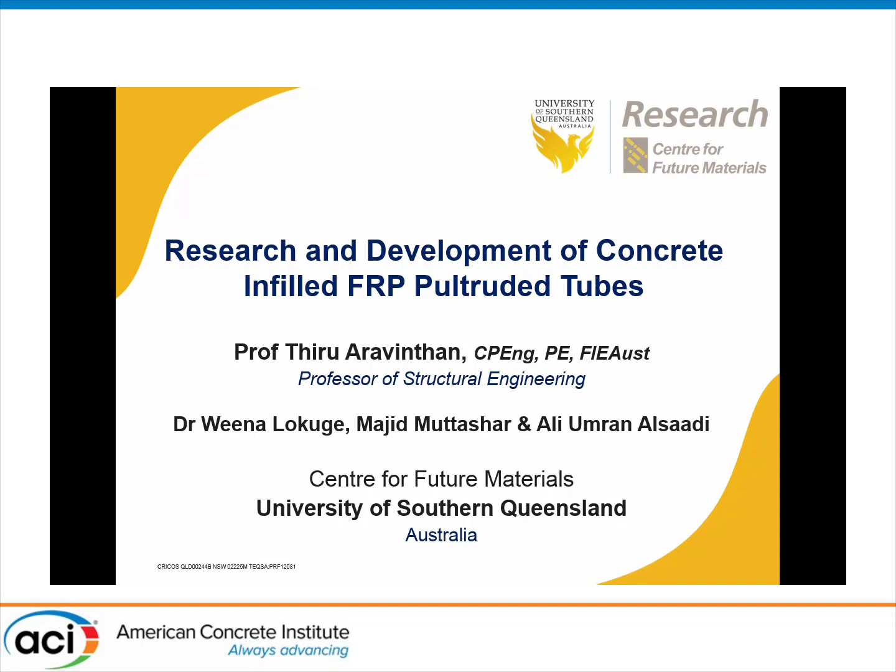So today I'll give a highlight of some of the work that has been done, particularly on the research and the development on concrete-infilled FRP tubes. At this stage, I would like to also thank my co-authors of this paper, Weena Lokuge, Majid and Ali Alsaadi. One of them is a former PhD student and the last presenter is a current PhD student as well at USQ.

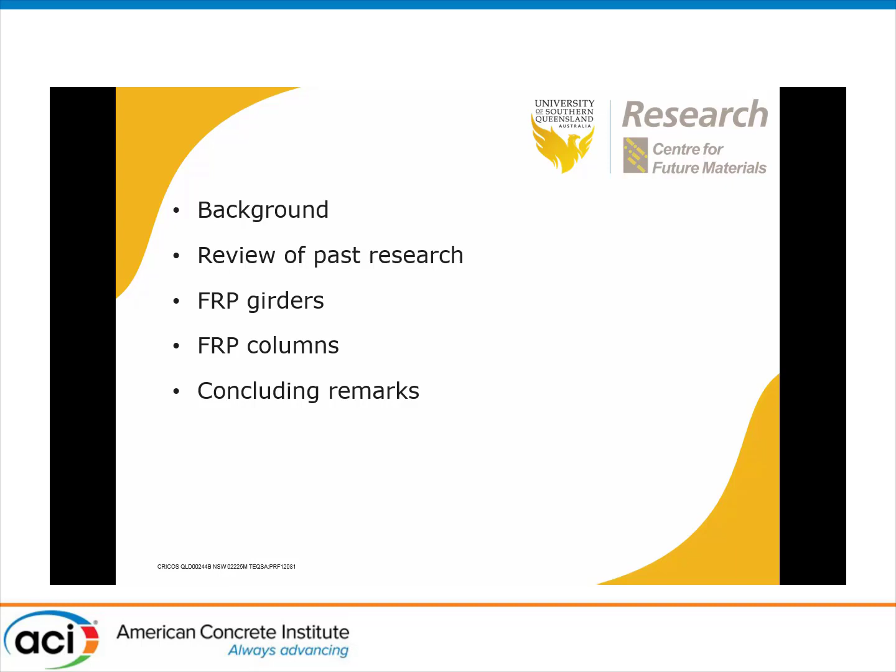The overview of the presentation will be in the form of looking at some of the background, review of some of the past research, and particularly focus on the work that has been done on FRP tubes as girders and the work that is currently being done as an axial member, particularly in the application of columns, and with some concluding remarks.

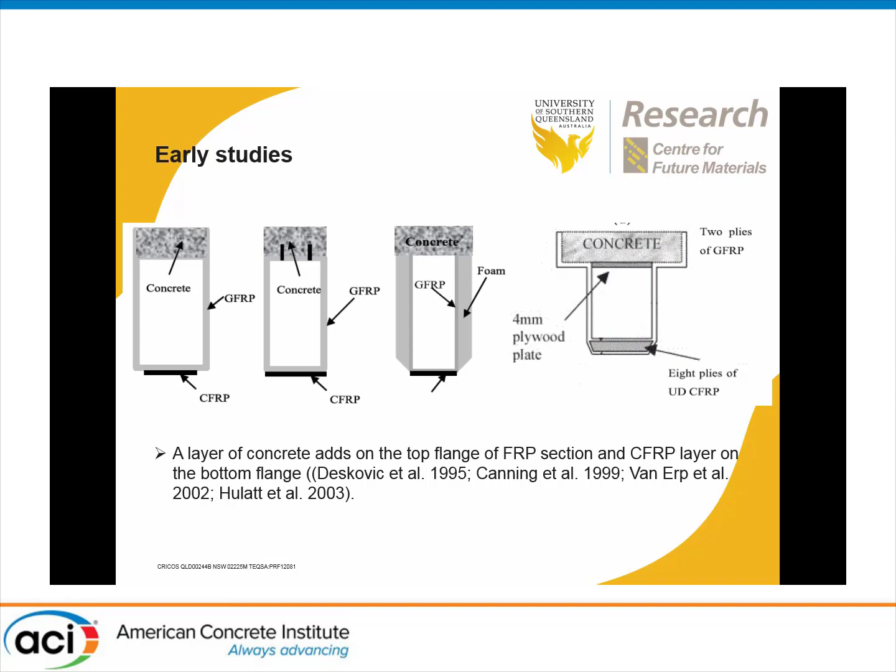Now, some of the early studies, probably you would have heard a lot about this, how as a concrete engineer we look at concrete structures and then start to look at how do we enhance its performance and how we use FRP, whether carbon, glass, in various forms. In the last 20 or 30 years, a lot of work has been done. So concrete structures, how do we enhance that? So then people start to look at it a little bit differently.

Now, can we combine this and make the FRP or fiber reinforced polymers one of the main components and also use concrete together with that? And this has resulted in some of the configurations as you would see here, like the concrete part followed by glass fiber laminates and more carbon fibers at the bottom instead of steel reinforcement. So that has resulted in these kind of structures.

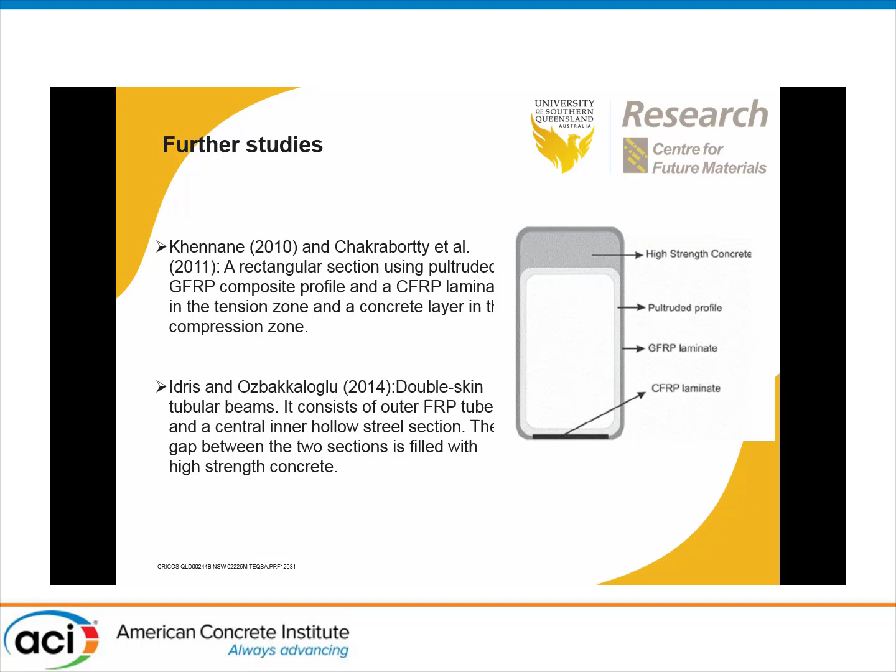And work has been done in this, particularly in the past at our university as well as in other universities. Particularly Amar Khennane from University of New South Wales in ADFA, and also at University of Adelaide there had been work done and well published in this. Then it went on to various other aspects of, okay, we have got these composites, how do we make use of that, and can that really be a product that can go into mass production as well as into the general civil infrastructure.

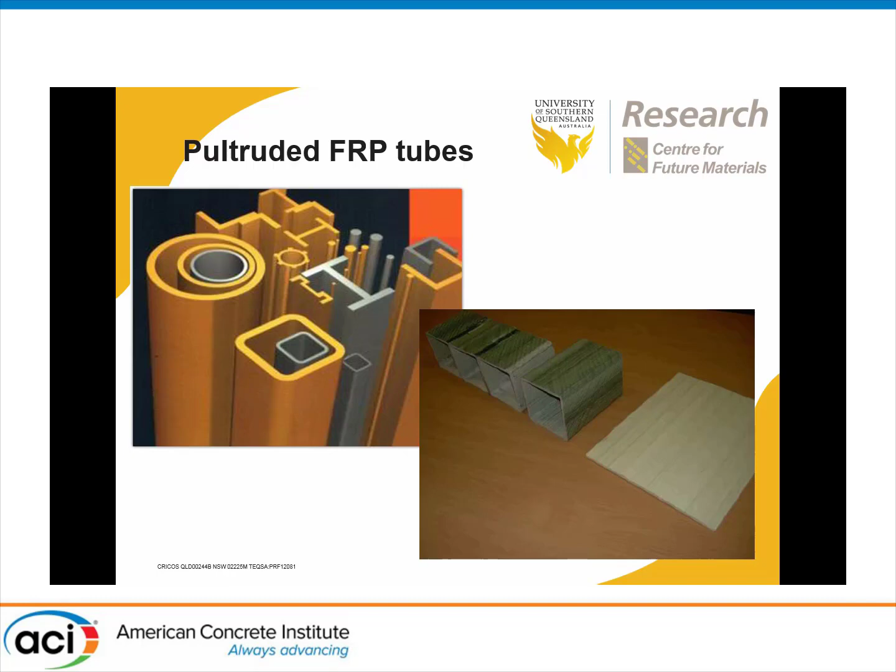And then we currently have various producers who produce pultruded sections in various shapes: I shapes, circular, square, and so on. Depending on the type of manufacturing, you will find some interesting products coming out into the market. Currently this is being promoted by the manufacturers. They are quite keen to get this into the market, and then as researchers we start to question how much it could be used and how it could be used, what are the issues and what challenges we have. So these are some of the things we look at as researchers in academia or in R&D organizations.

Now, pultrusion is commonly used in FRP composites. Carbon fibers and glass fibers have been heavily used in pultruded sections. But in addition to the normal pultrusions, where you mainly get the fibers in the main direction, the zero direction, the axial direction where it is being pulled, you have got the pulwinding technology where you can pull the fibers as well as wind some of the fibers around, forming fibers in the zero direction and also plus minus, like confinement fibers, around that.

So those are manufactured by pulwinding technology where you will get fibers in this direction and also in plus minus 45, where it's a continuous fiber that is manufactured and woven through. Only a few manufacturers in the world have got this technology developed. And so what we have looked at is, okay, how do these pultruded products perform?

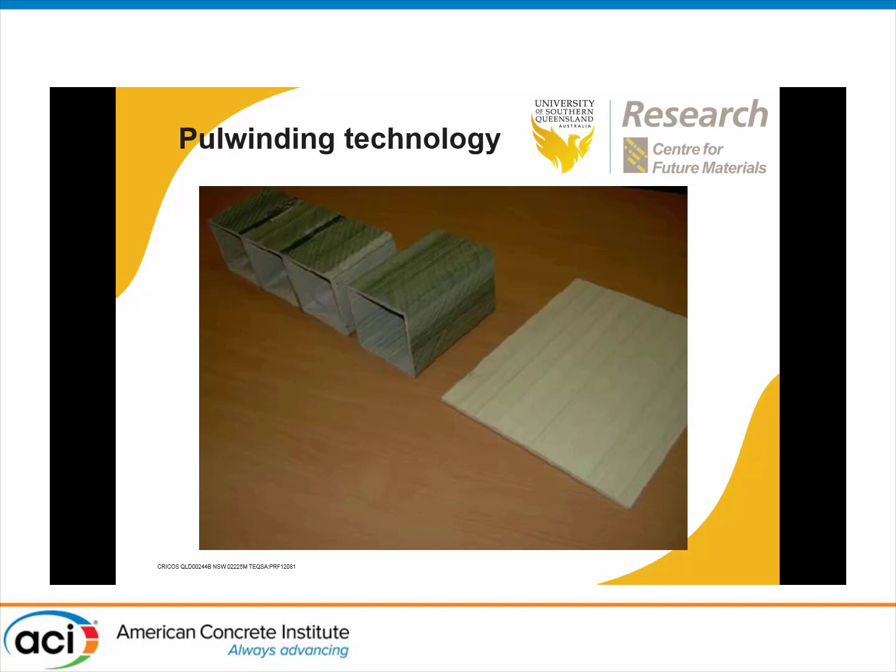We have got one particular manufacturer in Australia who has developed some products, particularly 100 millimeter, 4 inch or 5 inch sections, and flats and other things. Basically 5 millimeter or 6.5 millimeter thickness, a little bit about quarter inch, and 5 inch square or 4 inch square in the US, where we use SI units, 100 millimeters or 125 millimeters, in Australia and other places.

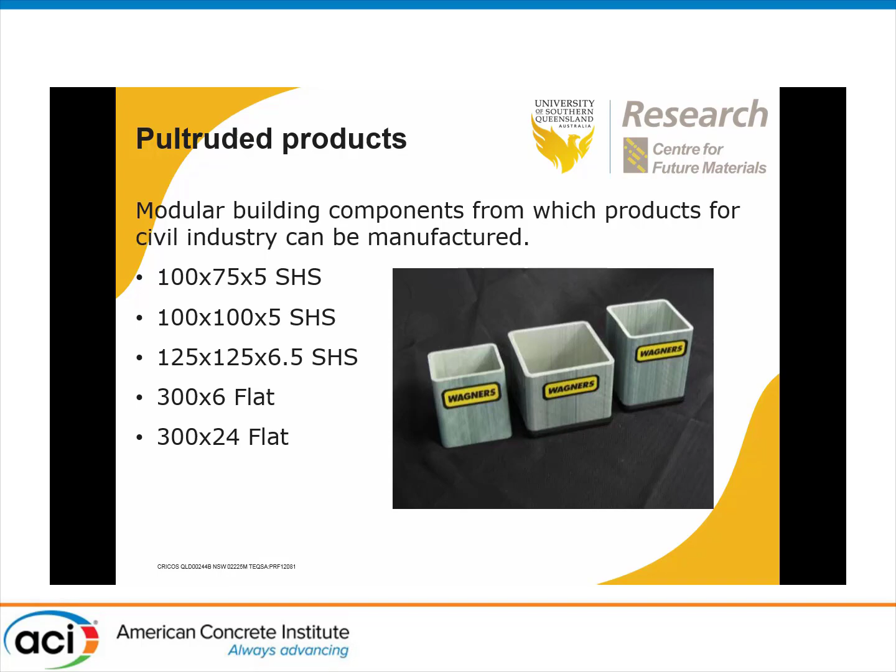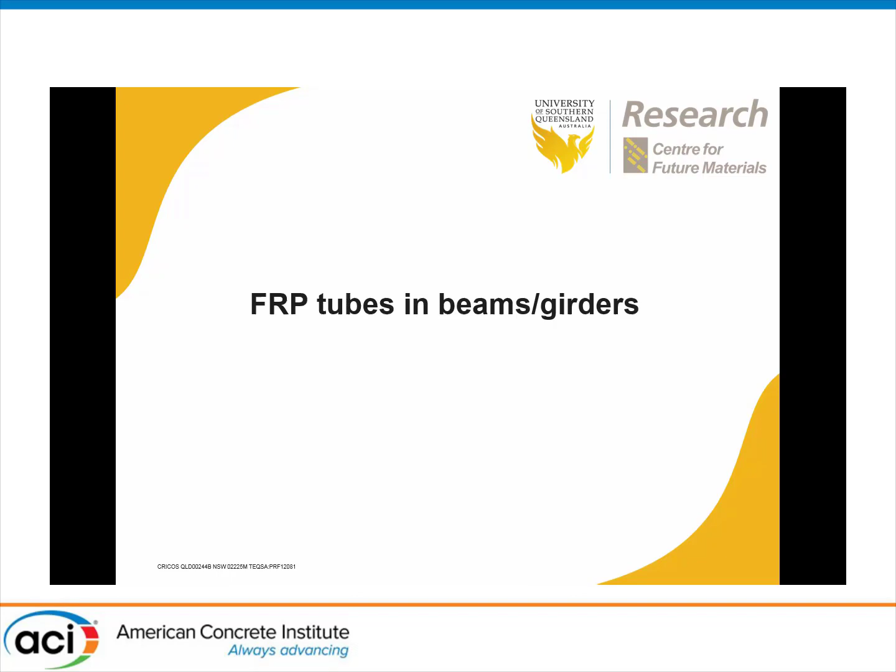So how are these products being used? The things we look at are beam applications, girders in the form of bridges and so on. And if we look at some of those applications, you will find these pultruded sections are being used as main girders, cross girders, and in some cases even as columns. And then that can lead into pedestrian walkways and other bridge structures and so on.

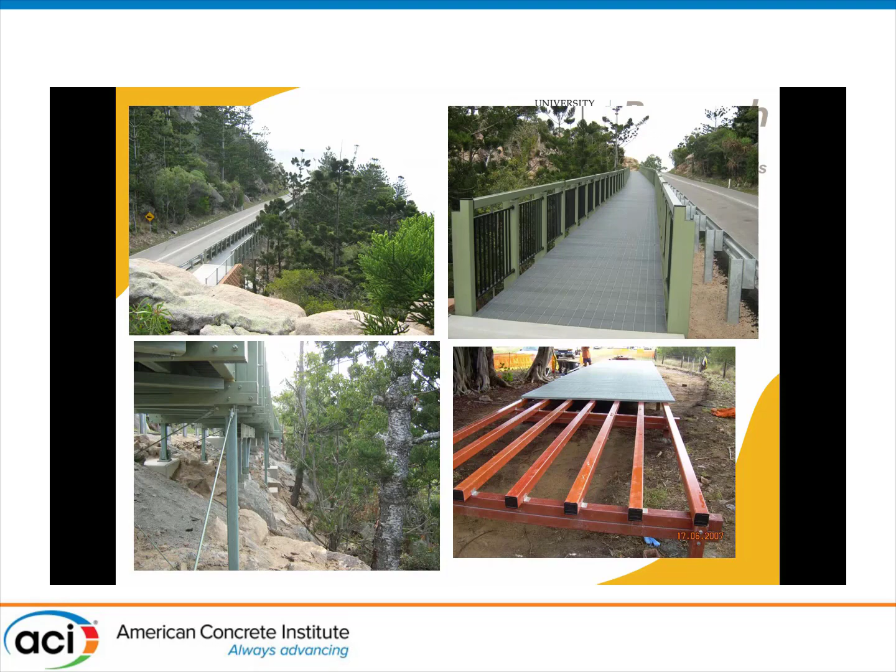And these have gone into some applications. These are using pultruded sections, and some other modularized forms of those pultruded sections with top and bottom flanges. So here you can see 3 of those pultruded sections have been combined with top and bottom flanges, typically replacing an I girder.

And then, of course, to make it to the market, you have to do mass manufacturing. And obviously, before it goes into anything in the field, considerable testing has to be done in proof loading and also ultimate testing and fatigue testing and so on. So this has been trialed and things seem to be working.

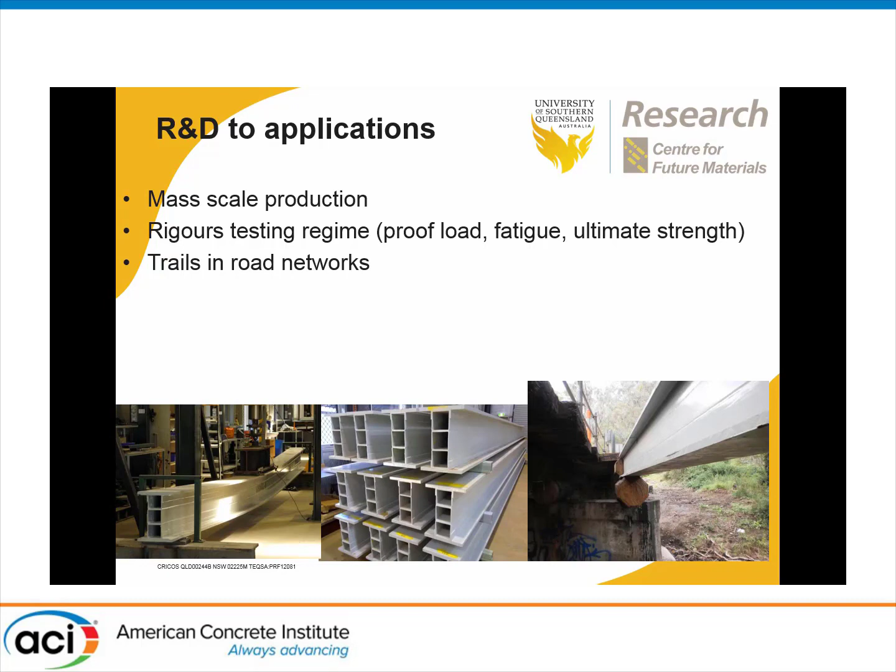But these are some other, again, various forms of pultrusions put in cell forms, multiple cells put together, and that is being used in forms. So the advantage of that is anyone who wants to invest in such products wants to make sure that they could manufacture the product at mass scale, and that way they have a return on their investment rather than going by each bridge where they had to produce a different product. That can be a very costly exercise. So this is one of the bridges completed through that.

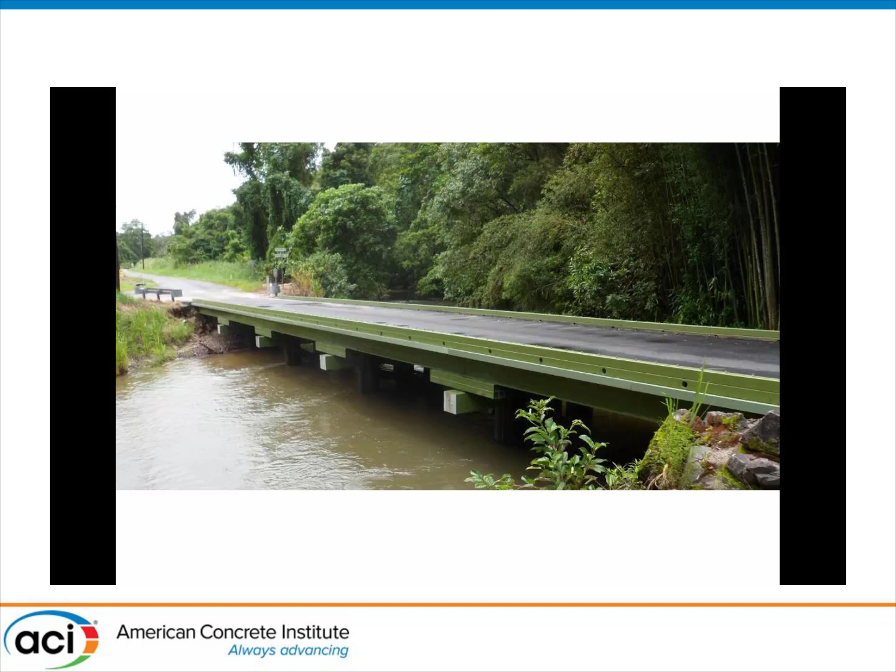Now, when we look at these FRP sections, what is our challenge? If you look at an all FRP structure, which is a linear material showing almost linear characteristics, at the end it fails without any warning, and a lot of civil and structural engineers don't want to even touch that, because people will ask what's the ductile behavior, how much it will extend in the post-peak behavior and so on, and that becomes a challenging question.

And particularly for those who are familiar with timber structures, timber is the closest material to FRP, because we have got the resins and the fibers in timber structures, and similar forms are formed in these artificially manufactured products.

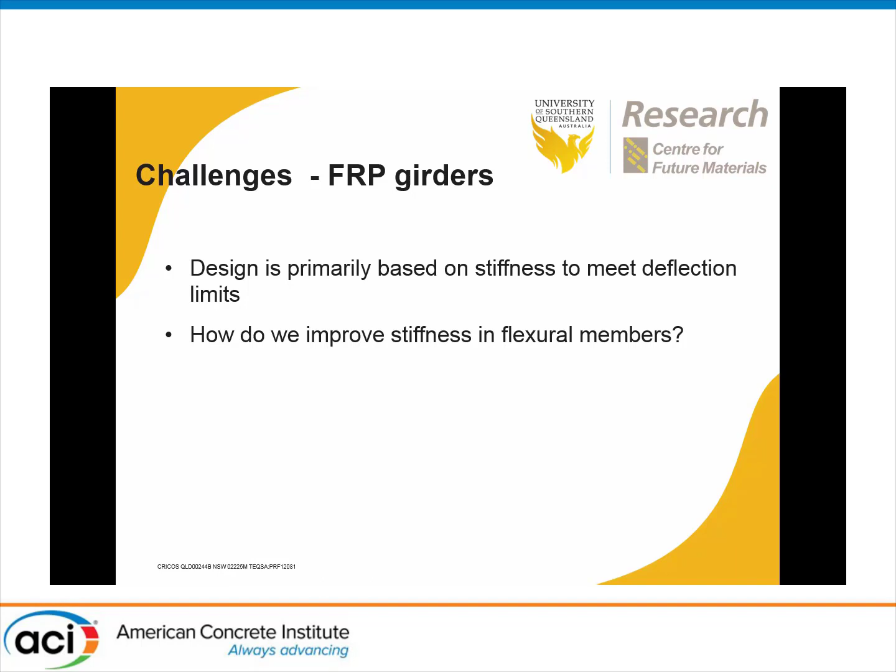In most timber design, the characteristics are governed by meeting deflection limits, and serviceability limit states become the governing criteria. Then when we use these as bridge beams, the main issue we have is how do we improve the stiffness, because for flexural members the stiffness criteria for deflection can be governing. How do we improve that? Because when we use all FRP or hybrid FRP structures, that's the main governing design.

So at USQ, what we have done is various testing, taking these pultruded sections as hollow sections, and then as filled sections, some parts filled, some hollow. So here you can see we have tested various forms in flexure, like a beam. How can we make use of this? This is a single pultruded hollow section being tested in a 4-point bending test.

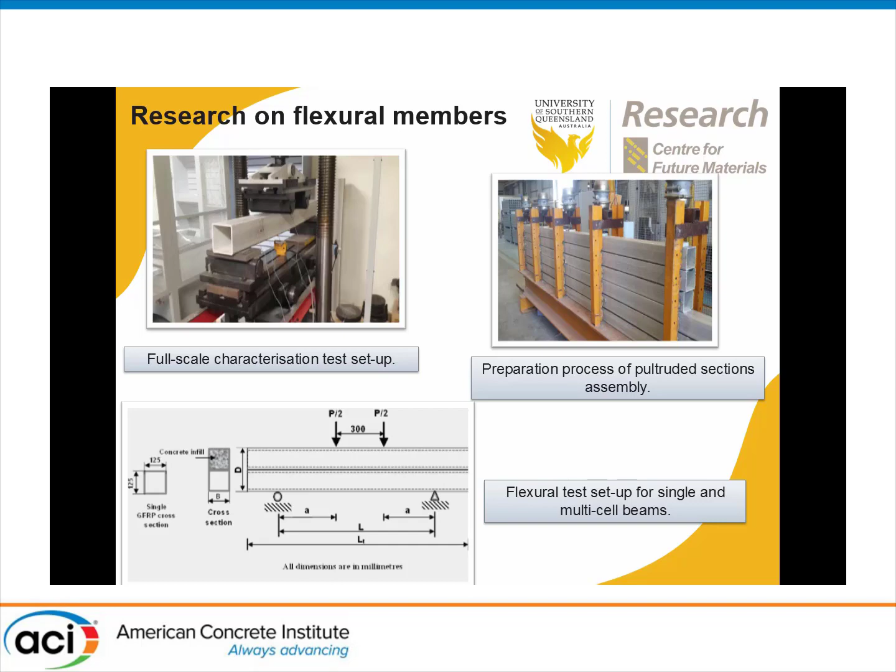So here we have 3 cells put together, and that has been tested hollow, and then with the top one filled, as you see in these figures, in 4-point bending. We got single cells and multi cells in this, and got results showing how the concrete infill can enhance the flexural performance of these structures. So that's what we see here with different concrete-filled flexural behaviors

on these particular FRP tubes. By the way, they are manufactured with glass fibers, so glass fibers and vinyl ester resin are the main materials used to make the FRP tube.

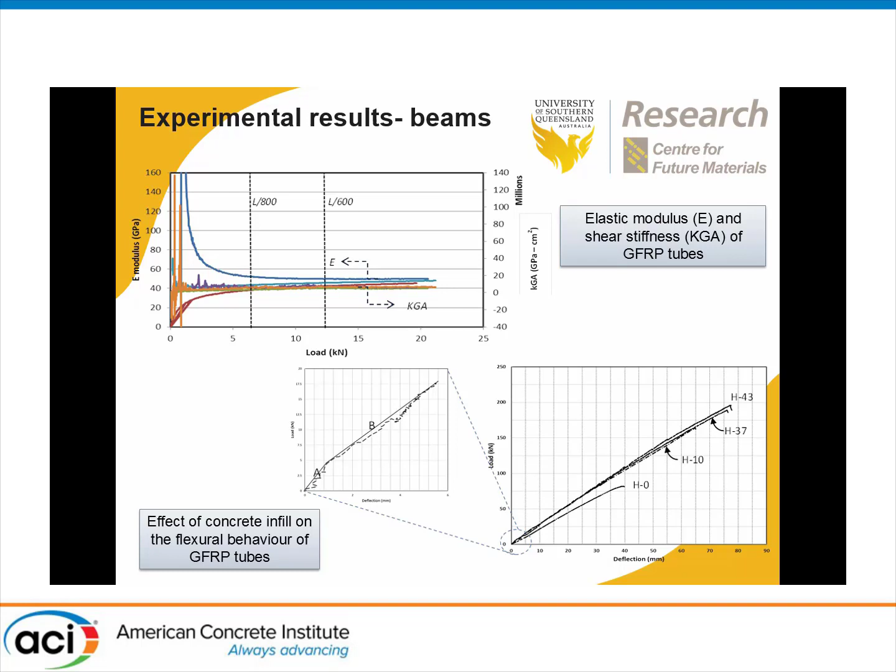So in the next slide I will show some of the failure modes you can see in flexure. So generally tension, and at the top you will get compression, and depending on whether it is filled or not, you might not get the tension failure, but these are some of the compression failures that are happening, and these are some typical characteristic failure modes you will observe when beams fail under this.

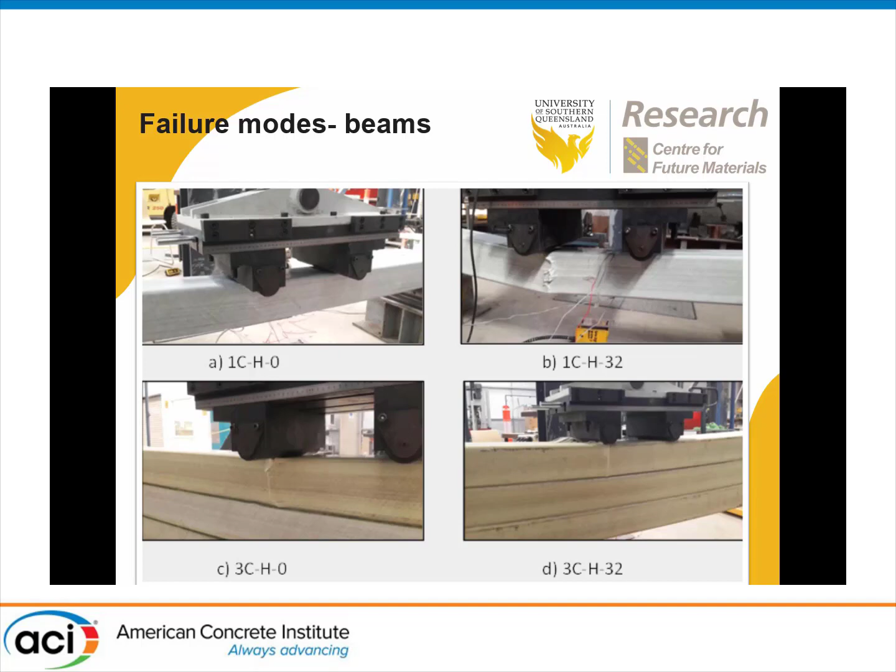So going through these results, what we find is when the number of cells is increased, comparing the strength characteristics of hollow and concrete-filled sections, as we increase the number of bonded cells, we find the stiffness can be enhanced, and by producing this we can also improve the flexural performance.

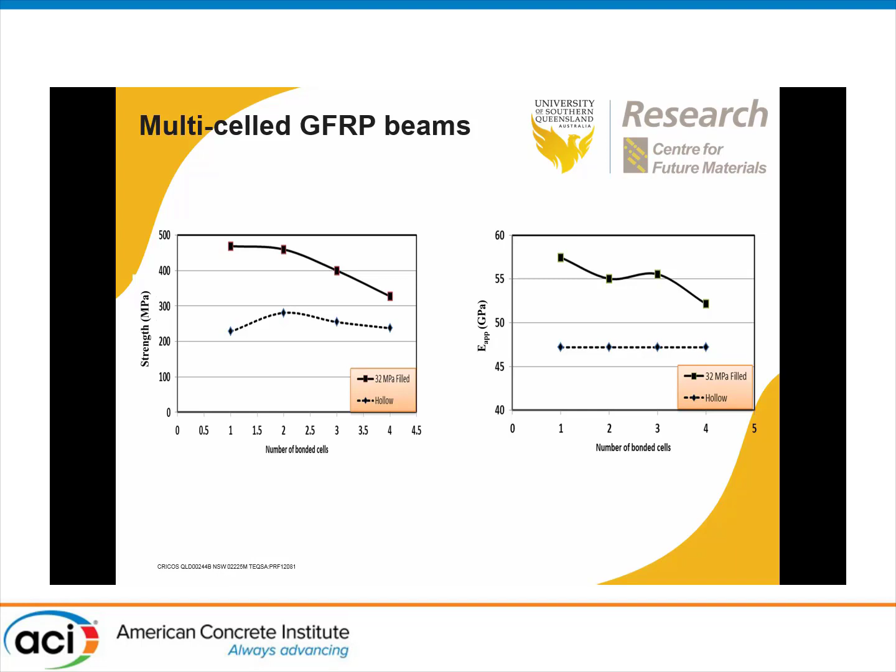So this is a beam, or a flexural member, we could use, and we can see some key results. Concrete infill can prevent local buckling, and the failure load can be increased by about 1.4 times, 40% extra.

Then multi-cell beams show much better flexural performance, and by only filling the top cell rather than filling all the cells, we can improve the characteristics in a much better way, because the compressive side is filled. And of course the concrete infilled tubes increase the apparent modulus as well, basically increasing the stiffness of the product. So this is some of the work we have done.

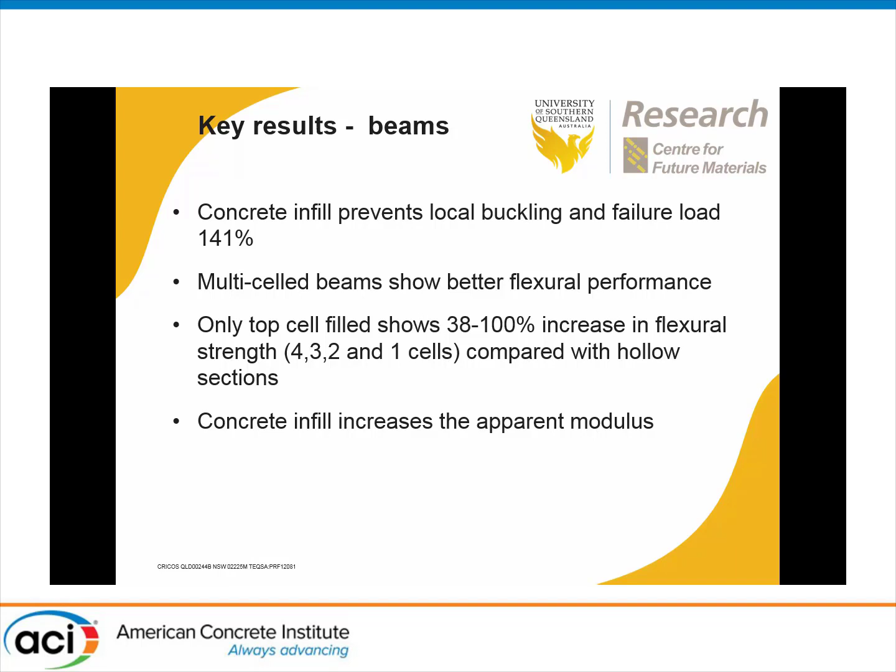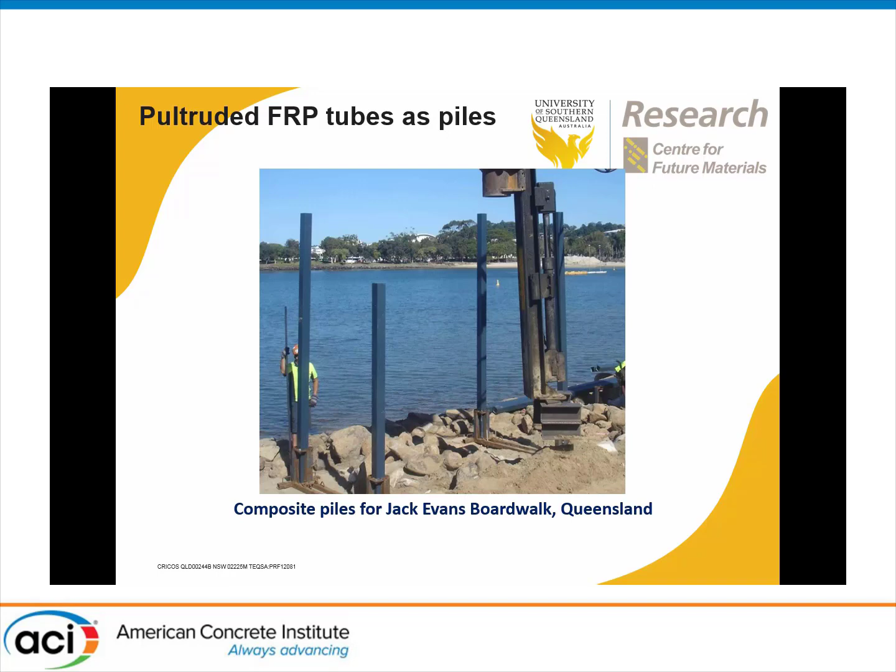Then we look at how these FRP tubes are used in different forms. As an axial member, what are the applications? You can drive them into the ground, particularly in salt water or environmentally challenging, hazardous areas where concrete or steel piles are not used. So these are actually being used in real sites, and this is some of the driving process.

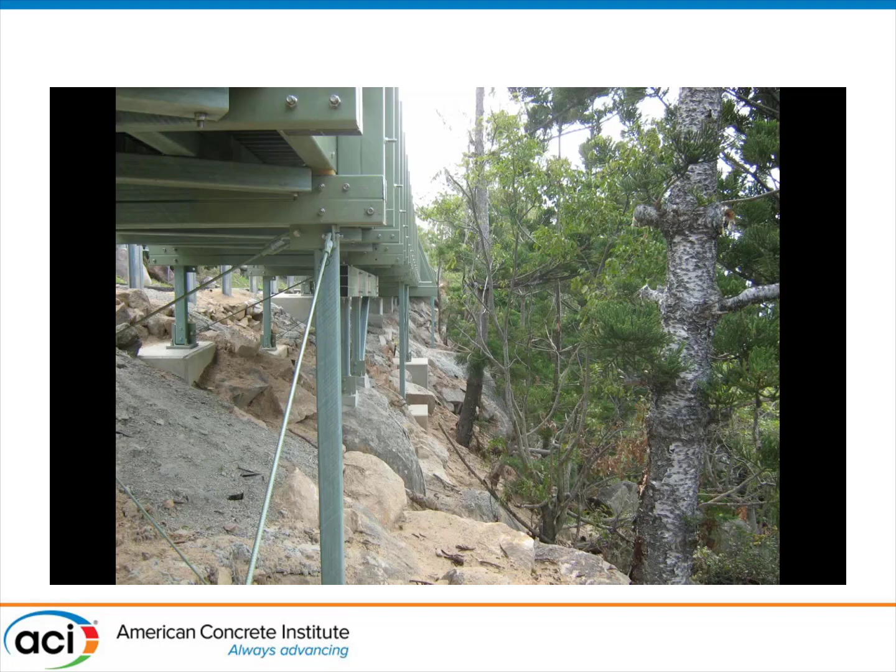And here you can see the pultruded tubes being used as the column or strut for that walkway. Again, it's a combination of pultruded tubes used in axial and flexural members. Now when we research axial members, there are questions on slenderness ratios, stiffness, instability conditions, global buckling, local buckling, and the interaction between global and local buckling. So these are some of the issues we face.

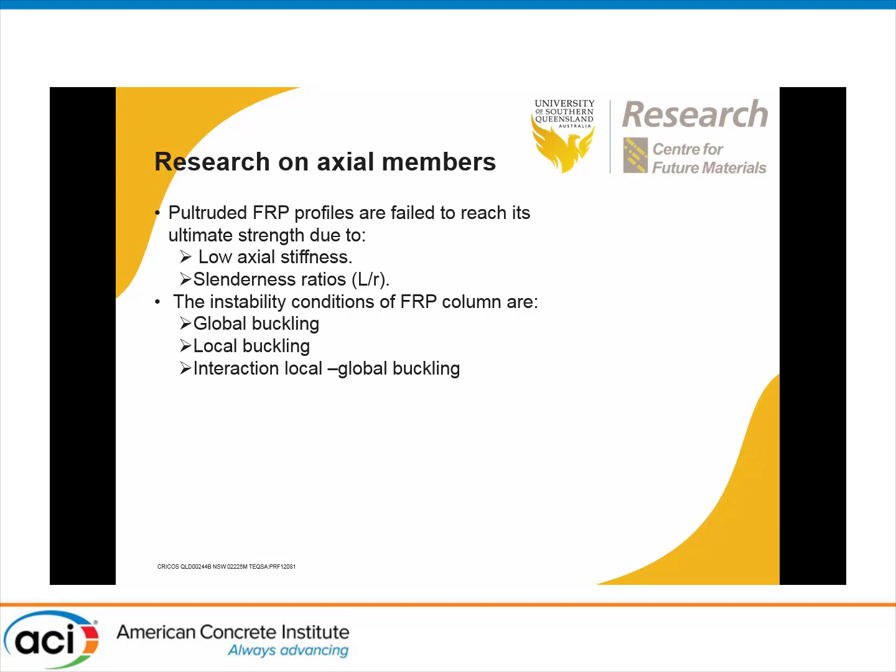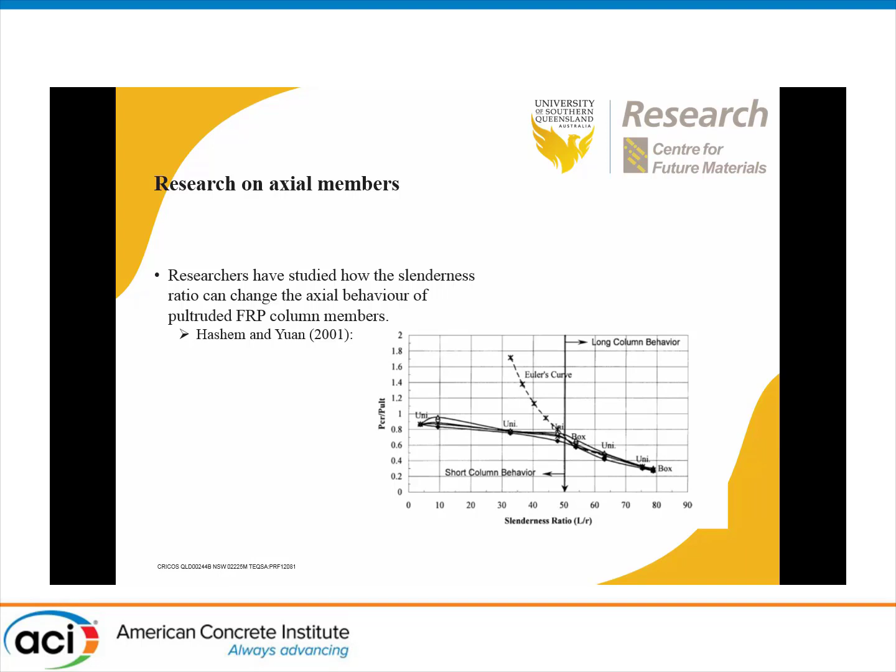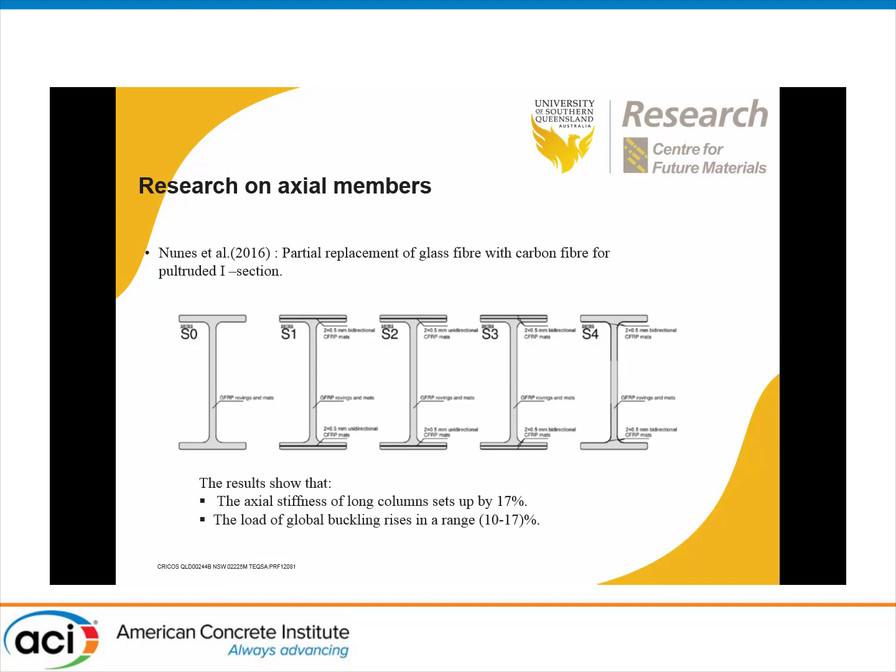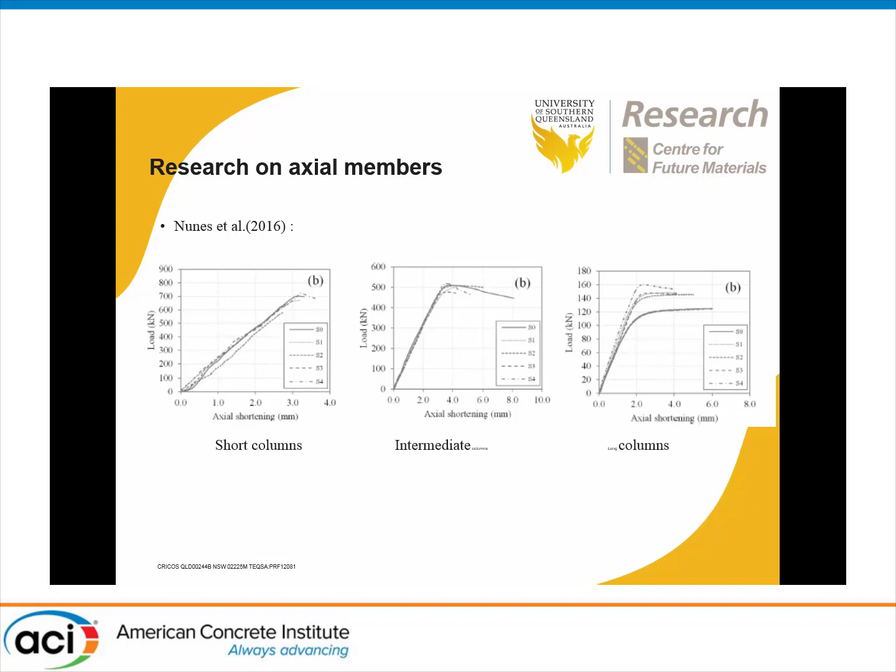People have done research, particularly about 15 years ago, on the slenderness ratio and the behavior of such columns, typically I sections, and other forms. In recent years I sections have been quite common, where carbon fibers, glass fibers, or hybrid sections have been used. Some of the results show how short, intermediate and other columns are impacted by the loads and these ratios.

So based on this, we have done some preliminary studies. We get various products these days, so can we look at some variables and see how they affect behavior? For example, we get square sections and circular sections. Some square sections look very similar but come from different manufacturers; one has fibers mainly in the main direction, the other has fibers in the main direction as well as using pull winding technology. Similarly, some circular sections have confining fibers wrapped around the sides, while others do not.

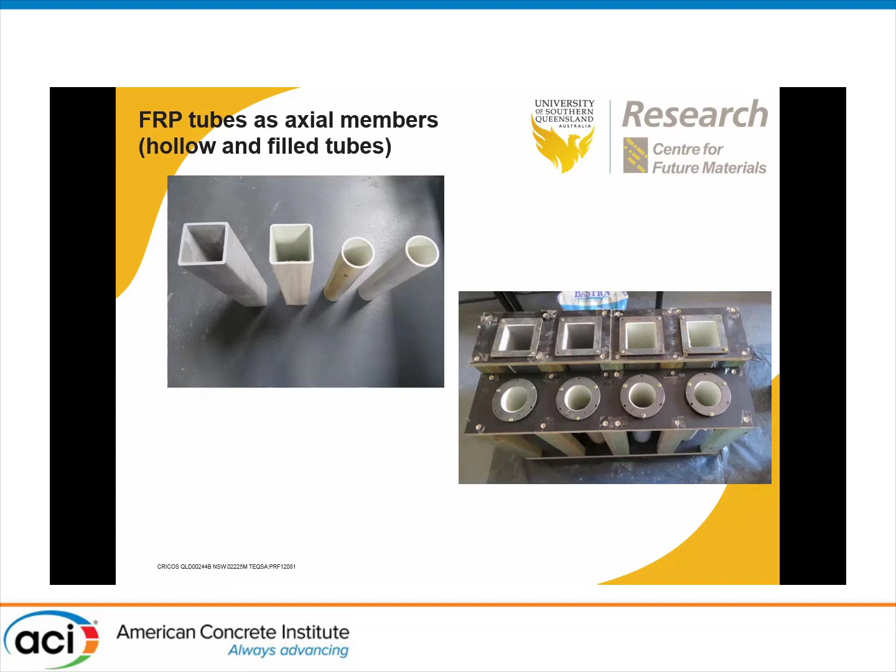As preliminary work, I'll show some of the tests we have done and some results. We filled some of them with concrete of different strengths, basically to vary the stiffness, and also different materials to enhance the stiffness, such as concrete-based, perlite-based products and so on. So here are some of the interesting results.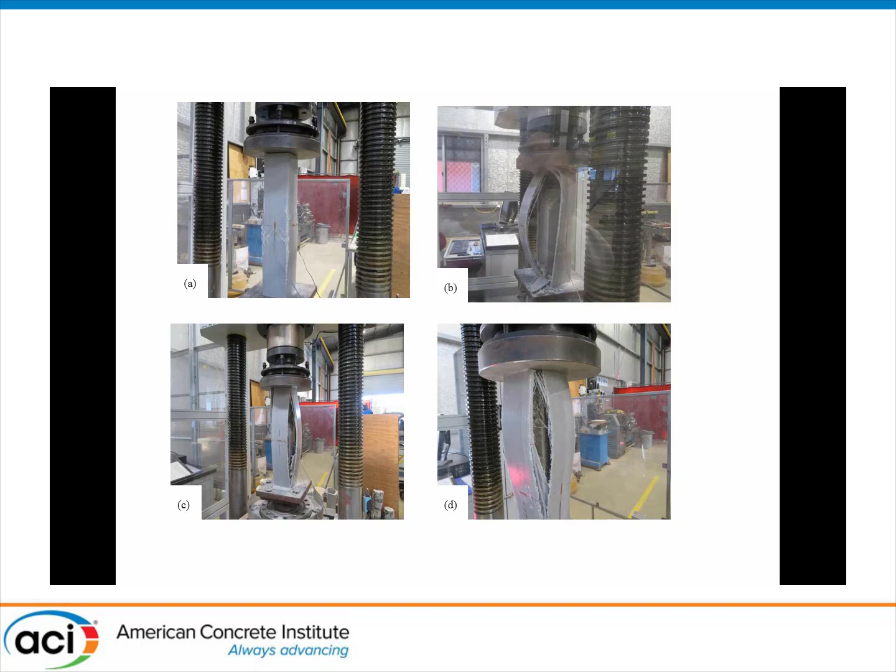And similarly, I'll show some figures of the circular sections. You can see fibers at roughly plus or minus 56 degrees, and some more tightly wound ones at around 70 degrees. There is no failure happening around the midsection as it loads, and only at the very end do you get failures at the top, and that's the ultimate failure we observe.

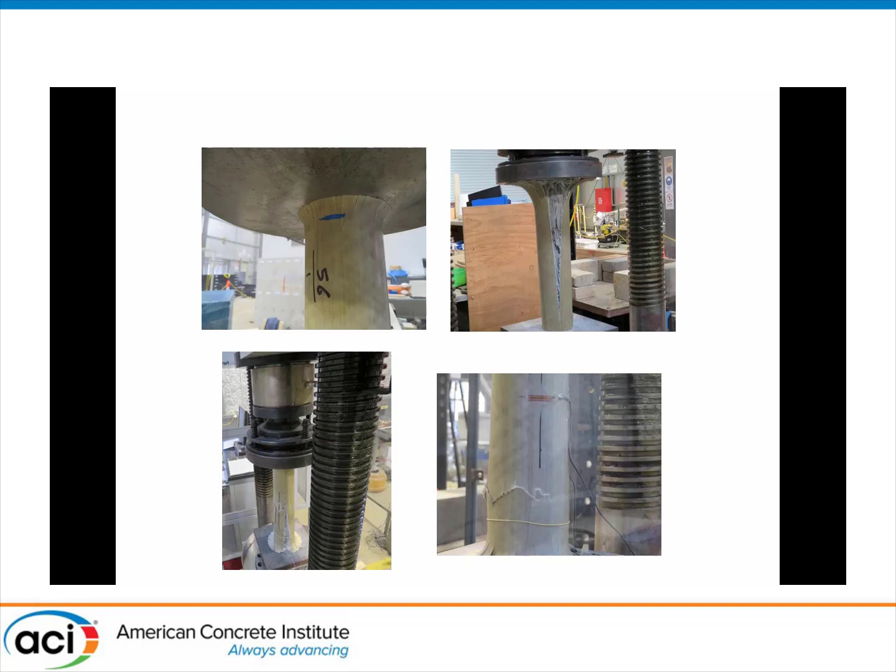And obviously in some cases, yes, it has gone, and then you get a little bit of crushing, pure compression type of failure as well. So these are some of the interesting results. These are very early stages of testing. This has been done just a couple of months ago.

The test has been done, and the initial result shows, yes, when you have certain filled concrete, we get a much better behavior. And in some of these cases, depending on the type of cementitious material we are using and the post-peak behavior, it is also interesting to note where this is the hollow core one, and this is with filled, and this is with further filled, and different stiffness and different strength, where you can sustain certain load,

around 20 to 30% in some cases, sometimes around 50% of the ultimate peak load has been sustained and continuous, and basically we can't fail it. It fails at much larger deflections or axial deformations. So similar failures we have observed in square sections and also in circular tubes.

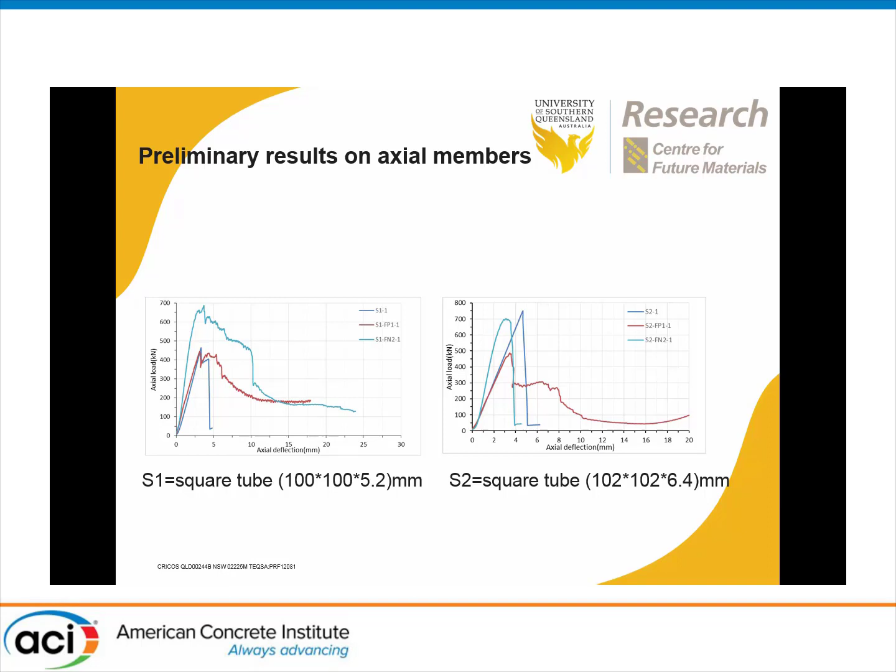So these are some of the preliminary work we have done, and we'll be publishing further once we have summarized all of this. So I thought it would be good to share here. And in conclusion, what are we seeing?

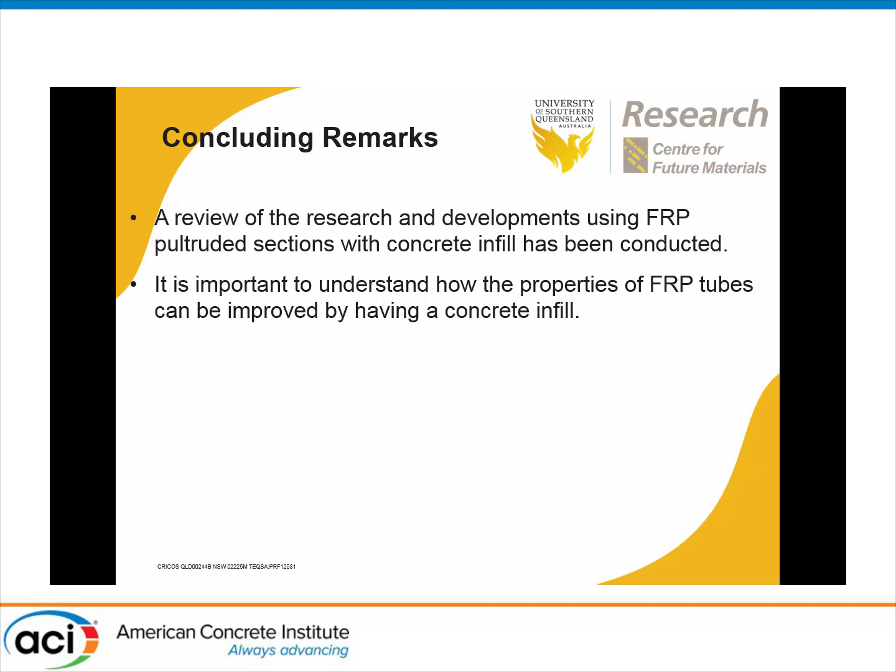We have reviewed some of the work conducted on FRP pultruded sections as concrete infilled sections, and what we find is it is important to understand the properties of the FRP tubes and how we can enhance them by having appropriately infilled concrete materials, concrete infills. In the case of pultruded beams, we do get indications of reasonable increase in stiffness due to concrete infills, and work has been done and published.

But when it comes to columns, we need to understand, and also in the form of beams, multi-cell beams show better performance, particularly optimally filling certain parts of the cells. And when it comes to columns, we had to really look at how these behave as axial members. While some of the results are promising, we need to do further work, and that work is currently in progress.